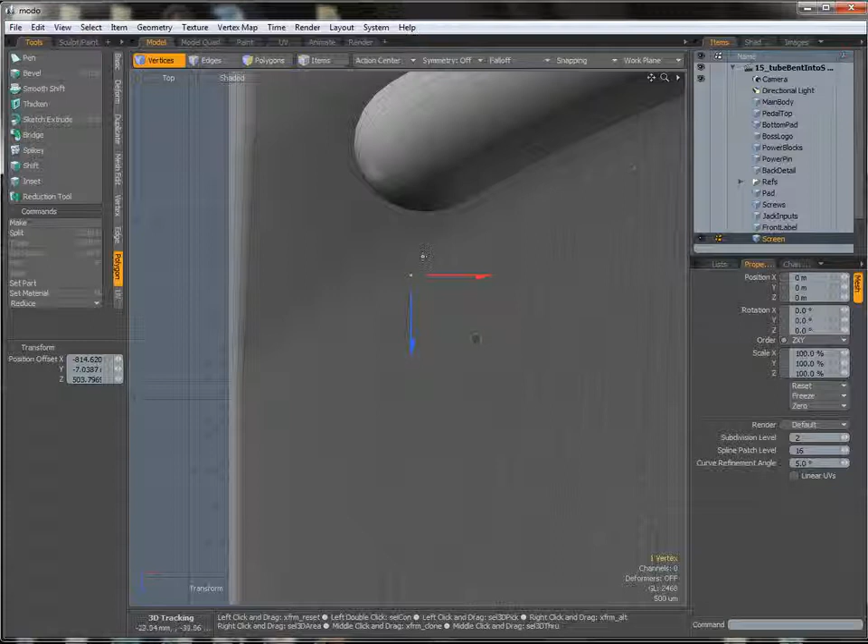That looks pretty good to me—that curve seems to be pretty much correct. I'm going to hit space to drop the tool. Now the other thing is that this curve is still coming down here and then straight out, same down here—coming straight down on this curve and then straight out towards the side of the pedal. What we want is for it to actually keep following the curve.

So I'm going to select all of these verts, and we're going to use a fall-off again. I'll come up to fall-off and click on linear, then click and hold on the right side up here and drag out to just past the left of these verts. Then I'll activate the move tool with the W key, and we're going to pull down slightly.

So what am I doing here? If you follow the linear fall-off shape, the verts here at this part are getting 0% of the move, whereas the verts on the very outer edge are getting 100% of the move. So it's moving them down kind of diagonally to follow this curve, and that's what we want.

Something like that looks pretty good to me—that looks pretty close, might even be a little bit low, but we can fix that in a second. I'm going to hit space to drop the tool, turn off our fall-off by clicking none, and these have moved slightly. This curve is perhaps slightly a little bit too low now.

So I'm going to activate the move tool, tweak these up a tiny little bit, then activate the scale tool, right click on this top vert, and scale this up ever so slightly, something like that. You can see it's really just a case of coming in and tweaking them until the polyflow looks correct. We could do the same for these verts here, but to be honest they're not particularly in need of it—it's these guys at the top and bottom of the curve that are important.

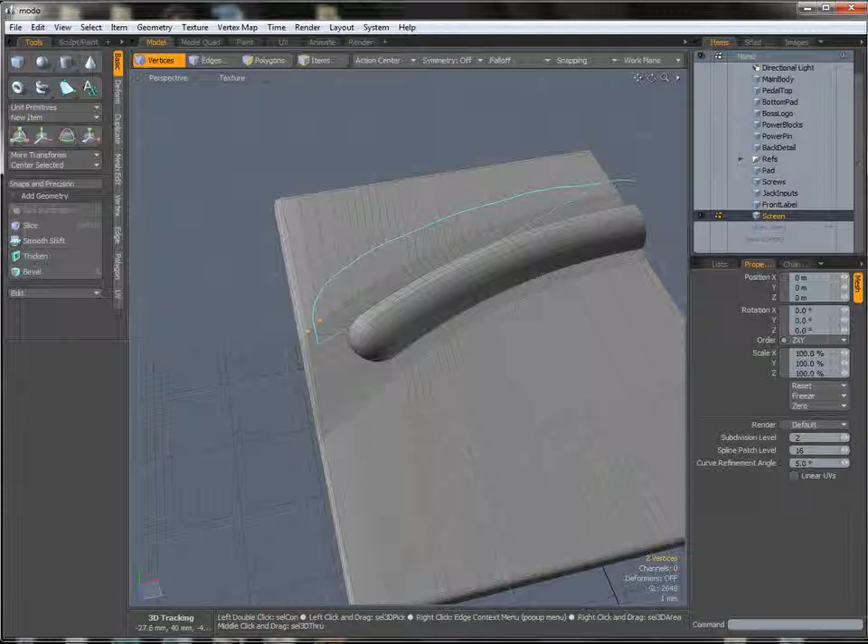Now why did this happen exactly? Well, all of the verts that we bent into position have been slightly raised on the y-axis. Now whether this is something to do with the bend tool or whether it's something that I did and didn't notice, it's a problem that we have to fix. So what I'm going to do is come in and lasso select around all of the verts that we initially bent into shape. I'm then going to go back to a side view, zoom in slightly at the top of this curve here, and activate the move tool.

Now what I'm looking for is for that vert to be at the same y value as that other one. So we want this vert here to come down to that line. So I'm going to move this on the y-axis until that is about there. So minus 160 is about correct. So I'm going to hit space to drop the tool and go back to perspective mode. Now everything looks exactly as it should.

So after saving our scene, we can now make a start on the button. So I'm going to bring back our ref objects. And you can see that we have to punch a hole through this screen object. And as this is quite dense at the moment, it has an awful lot of edges on it, we're going to do that in a new working mesh layer. So with that layer selected, I'm going to come up to the Basic tab and click on the Cube tool.

And we're just going to draw out the shape of that button. Now I'm going to make that slightly larger than the hole in the reference image. And when you're happy, I'm going to hit space to drop the tool, and we can hide the screen layer. So with the mesh layer selected, I'm going to select that polygon. We can bevel that in slightly. So by now you should be used to adding that extra line of polygons around an inset.

I'm then going to go to perspective view and zoom in slightly. I'm going to shift click to reactivate the bevel tool, bring it in again, so inset it and shift it down to create a top bevel. And then going to shift click again and drag this down to about there.

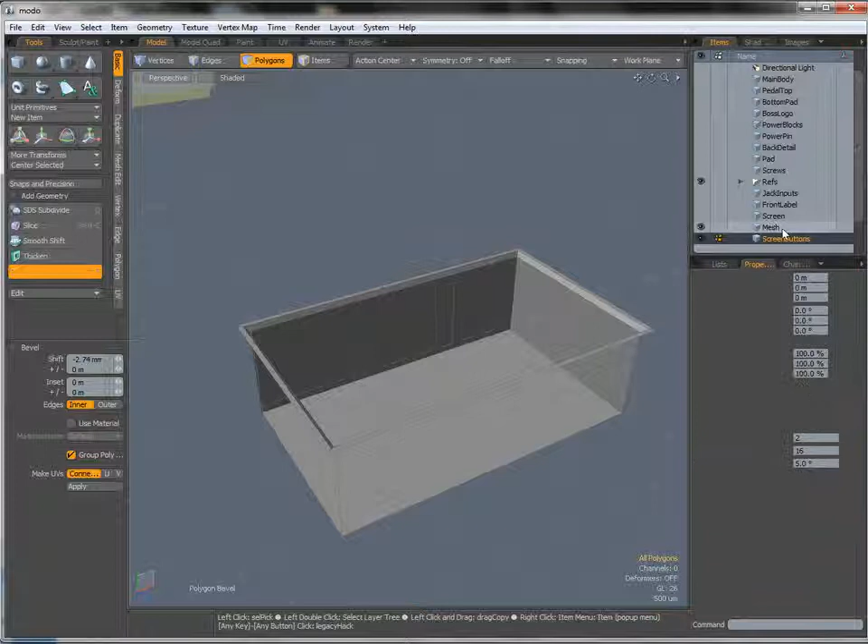Now this is actually going to make up the mesh of our button, so I'm going to cut that with Control X, go into a new mesh item, rename that Screen Buttons, and Control V to paste in that polygon. With that done, I'm going to reselect the mesh layer and click the eye next to Screen Buttons because we don't need to see that for now.

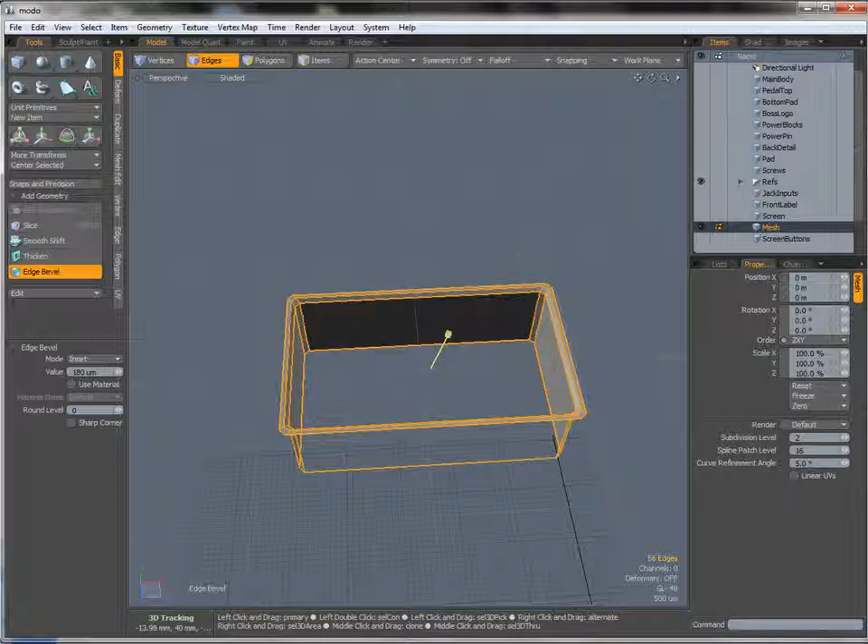Now I've still got the bevel tool selected, so I'm going to hit space to drop that, and we can start work on beveling these edges here. So I'm going to go to Edge Mode, and lasso select all of these edges, then hit B on my keyboard for bevel, and pull out an edge bevel with a round level of 0. So something like that looks pretty good to me.

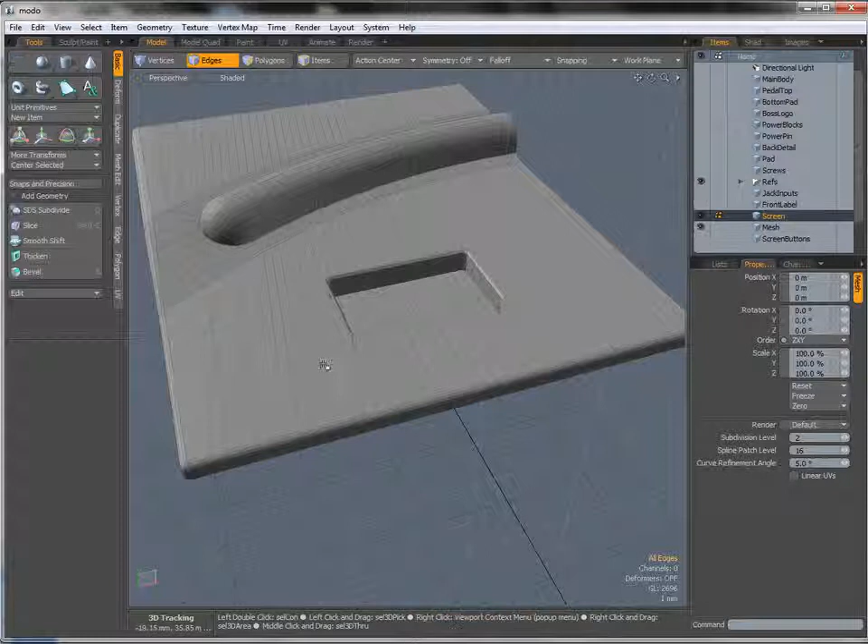Now, if we go into the screen object, if we bring that guy back, we're going to have to connect these guys up somehow. And at the moment you'll notice that we've got an awful lot of polygons making up the screen object. In fact, some of them are completely pointless. Take for example, if I go into the screen layer, all of these guys down here.

The fact that we've got a round level going this way is good because we're making up this nice smooth beveled edge. However, all of these extra polygons and edges going this way aren't adding anything to the model. In fact, they're just completely a waste of extra resources. We've added 170 polygons where we could have 6. So if we can somehow add in the button and clear this up so we have less polygons, that would be a great thing. And we can do that, and I'm going to show you how.

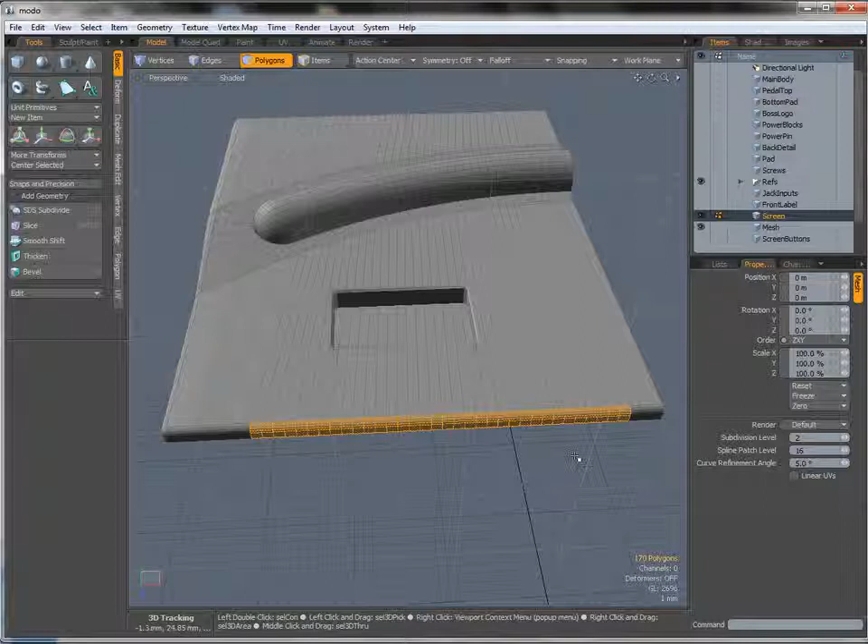So I'm going to deselect those polygons quickly. I'm going to go back into the mesh layer and we're going to position this at the correct height. So I'm going to double click it and go into a side view, zoom in, activate the move tool. I'm just going to pull that down until it matches the height of the screen object. With that done, I'm going to go back to perspective view, go into the screen layer, and we're going to delete all of these polygons.

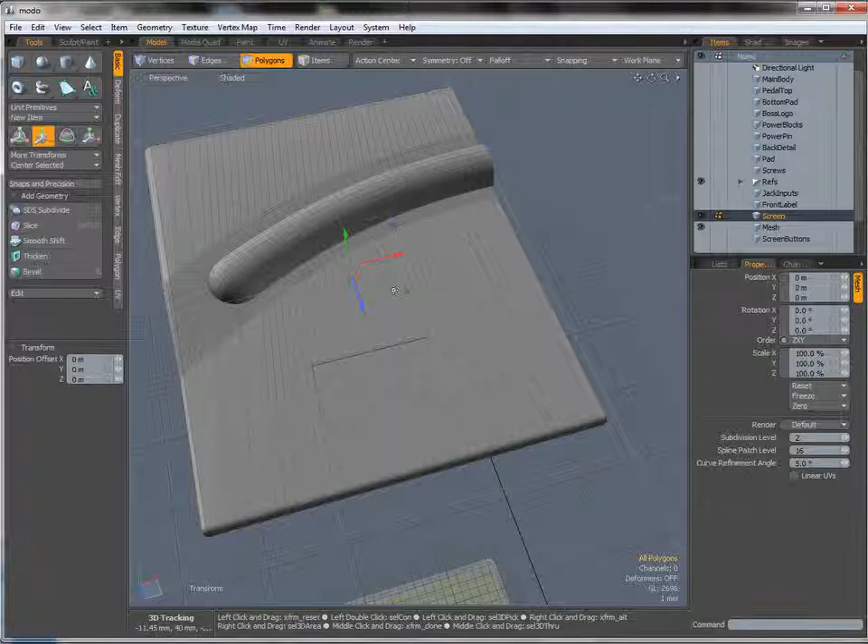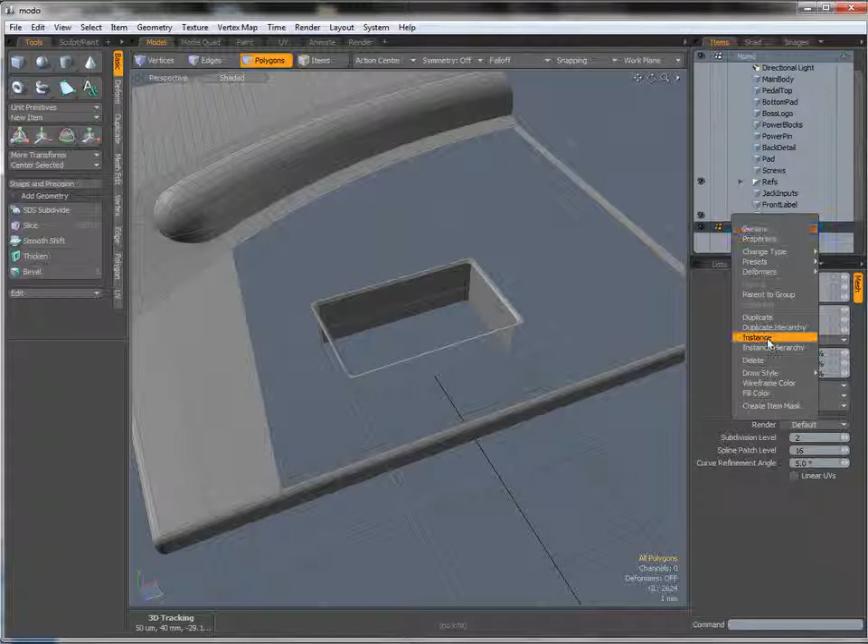So what I'm going to do is grab all of these guys in here except for this last one. We're going to leave that one there for the minute. And with all of these selected, I'm going to hit delete on my keyboard to get rid of them. Now that we've got the space there, we can move this button mesh into the screen layer. So I'm going to click on the mesh, double click this and click Control X on my keyboard to cut it, select the screen layer and Control V to paste it in, and then we can right click on this mesh layer and delete to delete it.

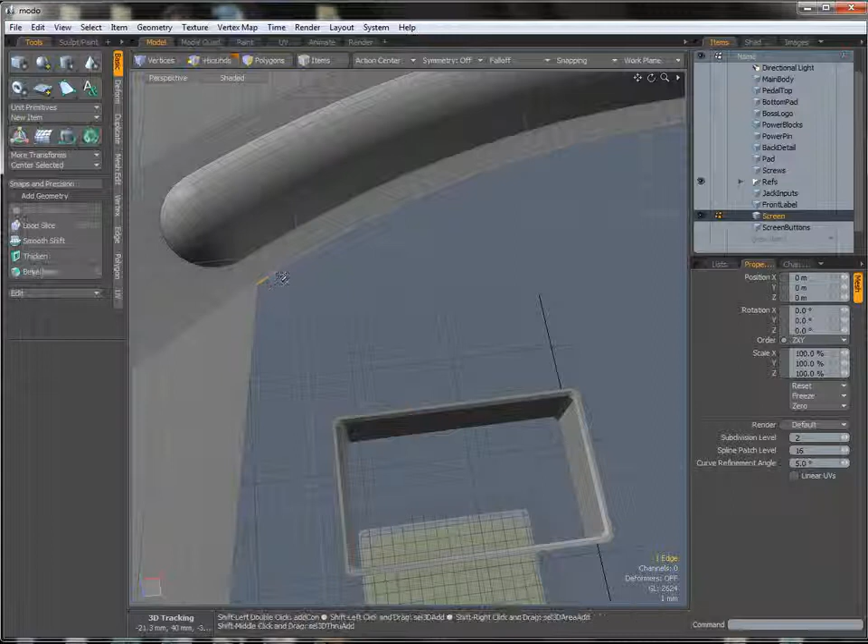With that done, we can go in and start connecting these guys back up. So I'm going to click on the screen layer. Now we're going to be using the bridge tool again to add in all of these polygons. So remember, we need the same number of edges in each of these edge loops. So first of all, I'm going to come up and select this edge, shift click that one, and then hold down the up arrow, which will continue that selection, and then tap out to the end here. So I just want these guys that border this hole. And you'll see that we've got 36 edges.

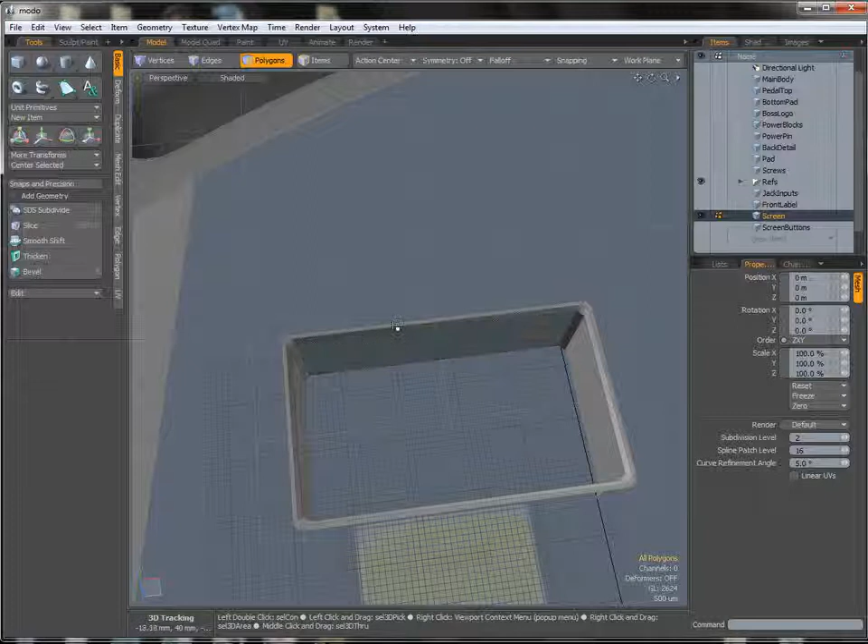So if we now come down and have a look at this guy, we've clearly got 1, 2, 3 edges. So we need to add in 33 extra edges in order to connect this top edge here to the top edge of this buttonhole. So I'm going to come in, click one of these edges and Alt-C for the loop slice tool. I'm going to right click and add in 33 extra edges.

Now with that done, I'm going to select all of these edges up the top here. Hold down the up arrow to keep selecting and then tap out the last few. I'm going to do the same down here. I'm going to shift click this first one and the second one, and then hold down the up arrow and then tap out the last few. So we're only going to these top bevels here. But with that done, we can come to the edge menu or the polygon menu, click on the bridge tool and right click, and we add in all of those polygons there.

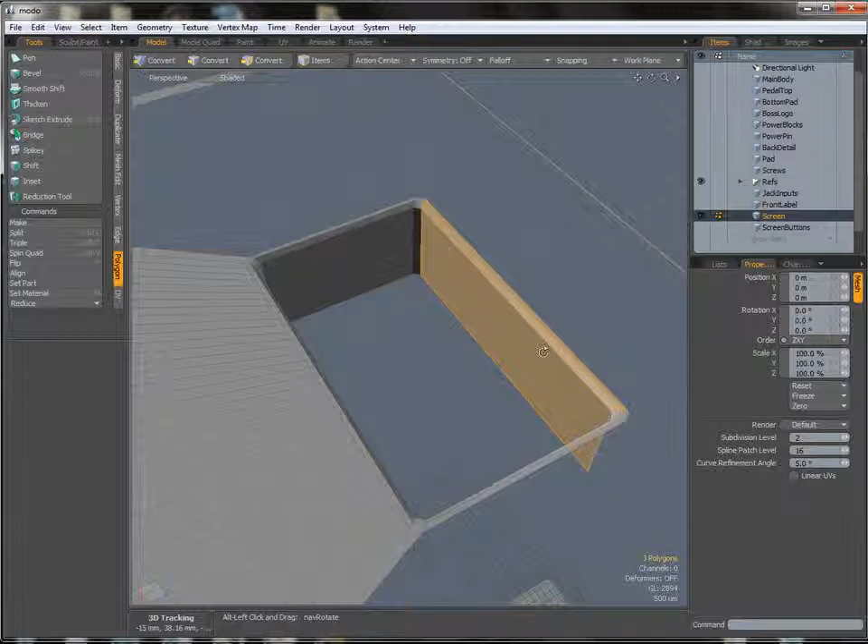Now you'll notice that with all of these edges added, now that we've got a hole down here, these edges don't actually continue to this side. So here we've only got a single polygon along the width. So when we connect this to here, we're actually not going to need all these extra edges. We can actually get rid of all of these guys. And that's exactly what we're going to do.

So I'm going to come in and drag along a couple of these edges, then hold down the up arrow on my keyboard to select along and tap out towards the end. Now I think I've gone one too far there, so I'm going to hold Control and drag over that guy. I'm going to hold down Shift and double click to select these edge loops and hit backspace to delete it.

Now what we want to do is come down the side here and we're going to connect this edge up to here. So I'm going to select both of them, click the bridge tool and right click. We'll then do the same on the other side, select that edge, select this guy, bridge and right click, which will join those guys together.

And then down here we only have one edge, but here we have 1, 2, 3. So we are in fact actually going to have to add in 2 extra edges on this section here. So I'm going to select one of these edges, Alt-C for the loop slice and right click, but we're going to change our count to 2 instead of 33. So we've saved ourselves a whole bunch of polys down here. We've really reduced that an awful lot, and that's always a good thing to look out for.

So I'm going to hit space to drop the tool. I'm going to select this edge, shift select that one and that one. Then I'm going to shift select that one, and that one. Come up to the bridge tool and right click to fill in the rest of those polys.

Now you notice that this polygon here is kind of skewing a little bit into the center down the bottom here, and that's fine. It's not affecting the smoothing at all because we added this extra line of polys around the buttonhole. But just for aesthetics' sake, I'm going to grab these verts and move them slightly on the x-axis to just below this line here.

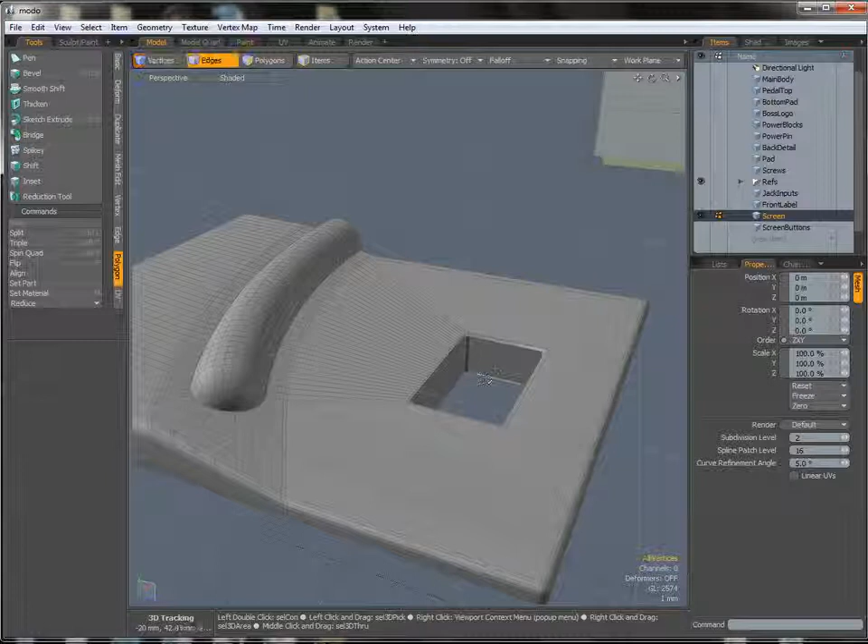And you may notice that the bottom of our button is far too low at the minute, so we're going to go in and fix that. So I'm going to double click this edge loop. I'm going to go into a side view. We want to pull this up to this bottom section here. So I'm going to pull up on the y-axis, zoom in maybe a little bit more, and try and get that as close as we can. Something like that looks pretty good to me. So with that done, I'm going to hit space to drop the tool and go back to perspective mode.

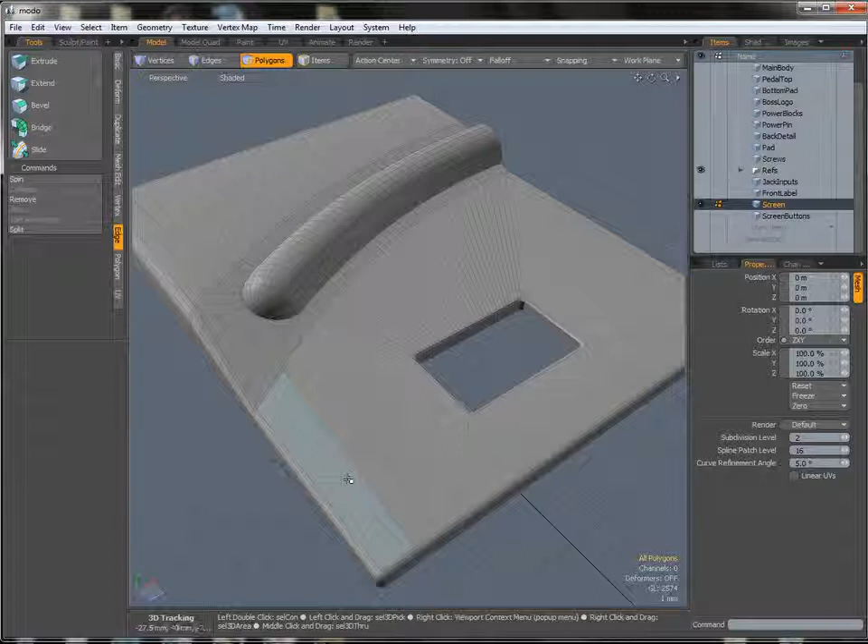We're now going to add back in the bottom of the screen object. However, instead of adding in all of these polygons from scratch, we're going to use some of these top ones to help us. So with the screen layer selected, I'm going to come in and start selecting some of these polygons. And the first thing I'm going to do is select this loop of polygons we created around the button inset. So I'm going to select 2 and then hit L for loop.

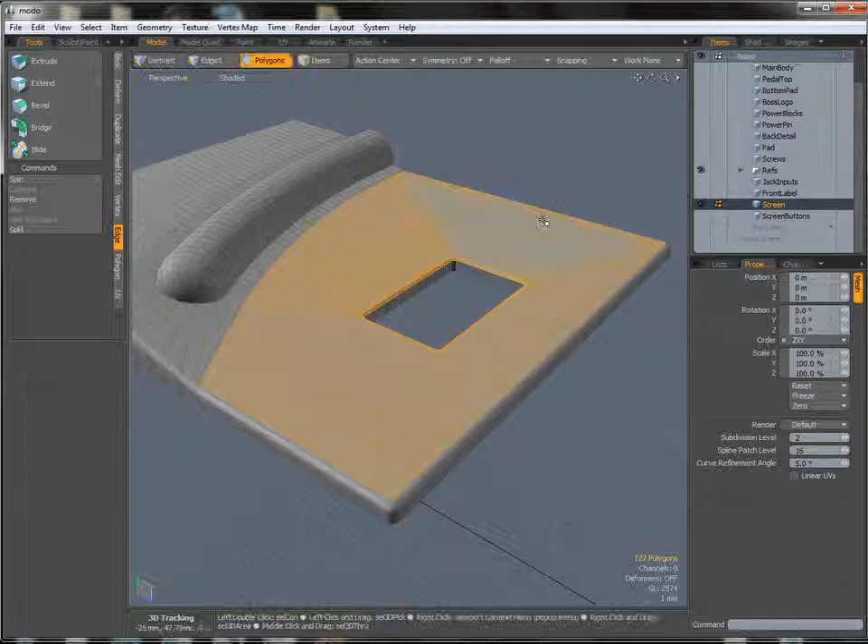I'm then going to hit Shift and the up arrow on my keyboard to expand the selection once. And then holding down Shift, I'm going to select this polygon and these 3 as well. So with all of those guys selected, I'm going to hit Control C on my keyboard and paste them into a new mesh layer with Control V. With that layer still selected, I'm going to double click the polygons and move them down slightly.

Let's switch to a side view quickly. You notice we do have some depth and height in there, so I'm going to hit the scale tool, which is R, and set the Y scale to 0, like that. With that done, I'm going to move these back up into position with the move tool. So something like that. Go to perspective mode.

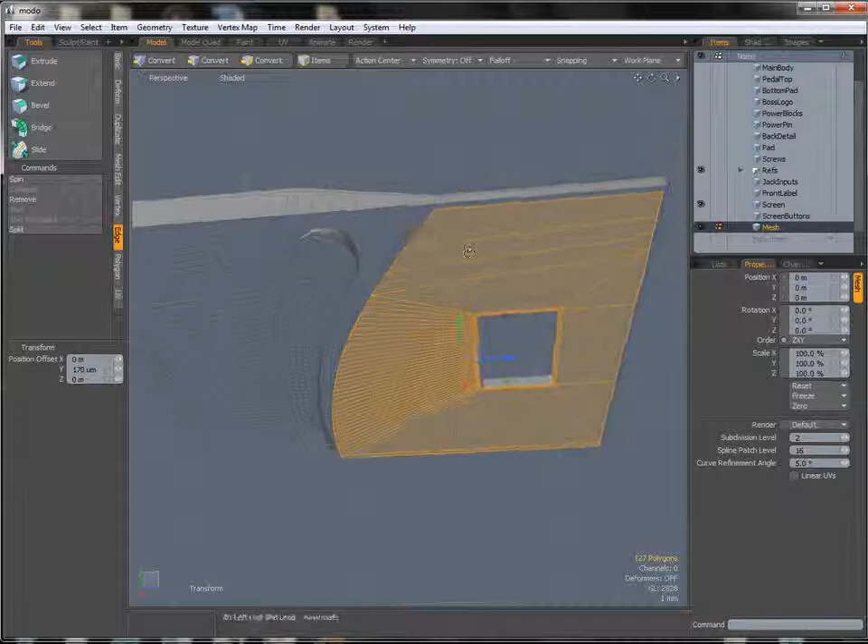If we go to the bottom, at the moment you can see that we can actually see through these polygons because they're facing the wrong way. So I'm going to flip them around with the F key. They become much more solid like that. And I'm going to cut them with Control X and paste them back into the screen layer. Before we forget, we can delete that extra layer over there.

So I'm going to select the screen layer again, and we can go in and start connecting up some of these holes. Now the first thing I want to connect up are these two edge loops in here. So basically what's happened is these aren't quite at the same level. So what we can do is basically use the bridge tool. I've selected both of these edge loops. Select the bridge tool and right click to join them up. I'm going to hit space to drop the tool, then come in and select this bottom edge loop like this and hit the backspace key to get rid of it.

Now you notice that we've got this outer line of polygons here. And then we've got this inner line, and this should be where our bevel is, but at the moment our bevel is pretty much non-existent. And we can fix that by going to Edge Mode, double-clicking this edge loop here, activating the Move tool, and then moving these on the Y-axis, like that.

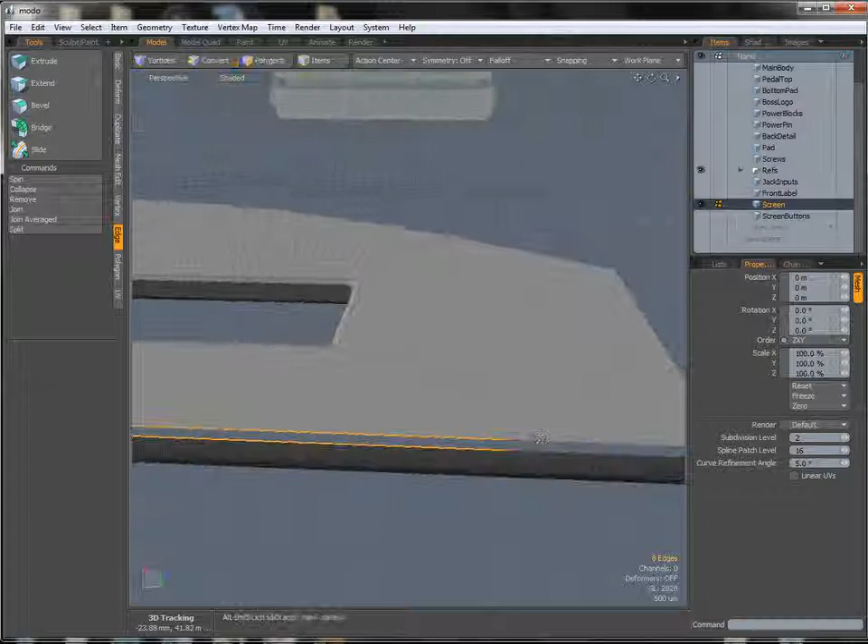So with that done, I'm going to hit space to drop the tool, and we can start filling in some of the other polygons. I'm going to come to this edge down here, start selecting these edges that we want to fill in with the bridge tool. You notice because we copied and pasted them, they've got the same number of edges in each loop that we're connecting. So with these 8 selected, I'm going to come up to the bridge tool and right click to fill those in and hit space to drop the tool. And then going to skip this corner and fill in these side ones. So select both those edges, bridge tool, right click to activate.

We can then zoom in on this corner, double click that edge loop and hit P to fill it with a polygon. And then obviously this is an n-gon, it's not 4-sided or 3-sided, so we need to fix that. So I'm going to deselect those edges, activate the edge slice tool with the C key, and drag an edge from the middle of this curve here to this edge there. And that turns both of these into quad polygons.

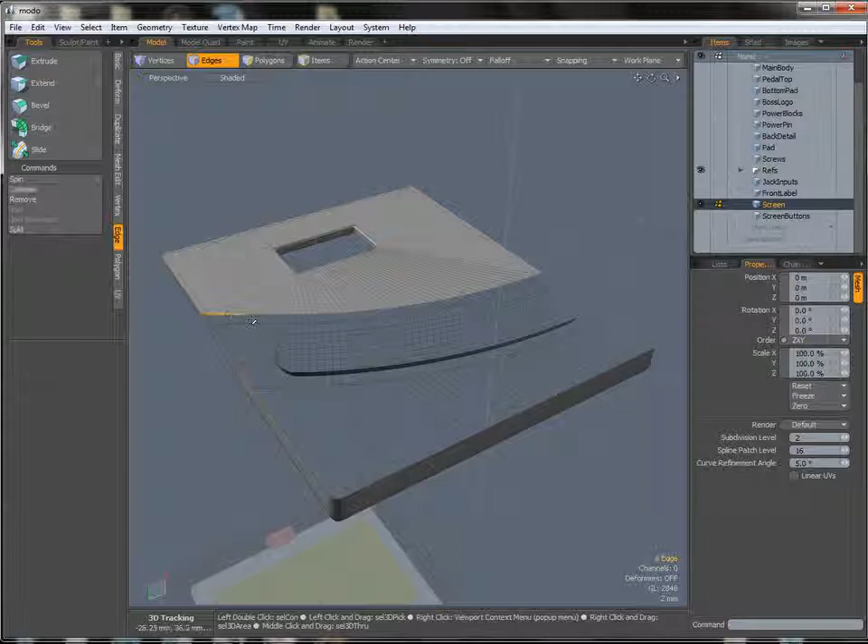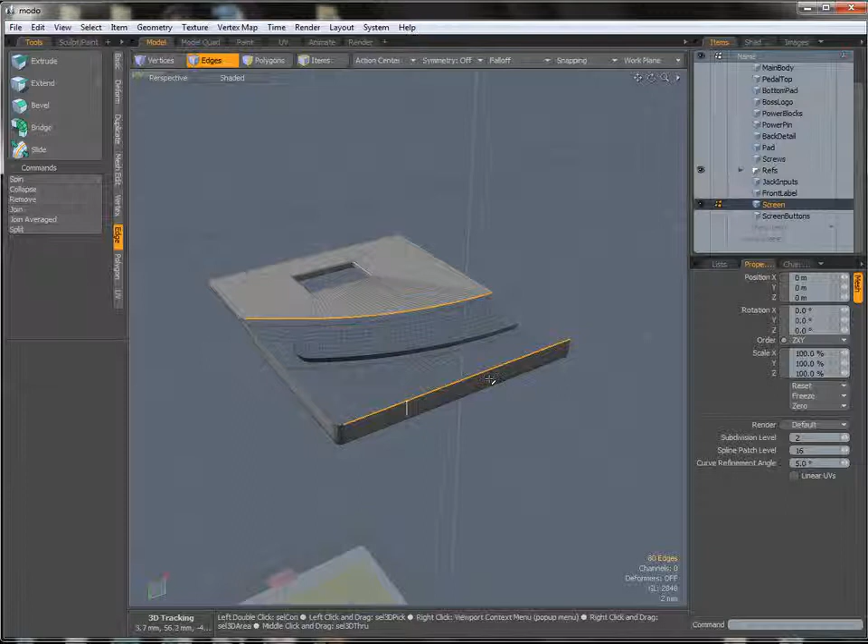We can then fill in the rest of this bottom area of the screen object. So I'm going to start by selecting these edges. I'm going to miss out this first edge here, shift select these second two, and then hit the up arrow on my keyboard to the very end. So I'm going to tap out the last couple like that. We've got 40 edges selected there. I'm then going to come into this part, miss out this corner, shift select this first edge and the second edge, and then tap the up arrow to the very end. And you'll notice we have 80 edges selected, which means we've got 40 in this part and 40 in this part, so we can use the bridge tool to connect them up.

Now all we need to do is add in this last polygon. We're going to start with a corner here, and what we're going to do is the same as we did down the front. So for that we need an extra edge along here, so I'm going to activate the loop slice tool, and with the count of 1 I'm going to drag this into position about there. I'm going to hit space to drop it and create that polygon on the corner there, like so. So I'm going to select all those verts in a clockwise direction and hit P on my keyboard to create a polygon. And then going to split that up with the edge slice tool, which is the C key, into 2 quad polygons like that.

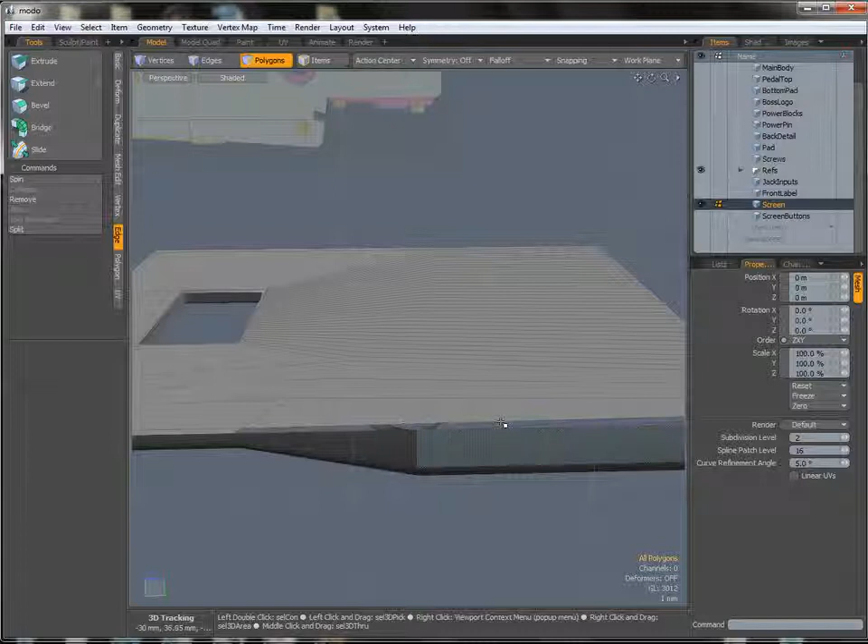Now what we need to do is fill in this last section. So I'm going to double click the edge loop and hit P to fill it with a single poly. And you notice that this thing looks kind of crazy. It's flipped out on us and gone completely white. And this happens sometimes when you've got a lot of edges coming into the same kind of area like this. So we're going to go down these one by one and create these into quad polygons. So first of all I'm going to select one of these edges here.

Alt-C for the loop slice tool. I'm going to drag it out like that. And you see instantly that polygon has sorted itself out. It's kind of reconfigured it because you've got an extra point on that edge there. So I'm going to drag this out to about that level, space to drop the tool, activate the edge slice tool and draw an edge between them like that. So now all of these are quad polygons, which is what we want.

And now we're going to change these into quads. I'm going to start off by activating the edge slice tool and drawing an edge from there to there, which turns this into a quad polygon. I'm going to do the same on the other side of this. So I'm going to draw an edge from there to there, which changes this into a quad polygon.

Now we need 1, 2, 3 extra cuts along this section here. So I'm going to select an edge, loop slice tool with Alt-C, and right click, change the count to 3. And with that done, we can use the edge slice tool to add in the rest of these cuts, like so.

Now all that remains is for us to bevel this bottom section, so I'm going to double click one of these edges to select that loop, double click this guy to select this loop, and I'm going to come in and manually select those two. I'm going to come up to this section and keep selecting some of these guys. And then I'm going to double click this one, which will select up to this corner, double click this one, which will select up to there, and then all of these.

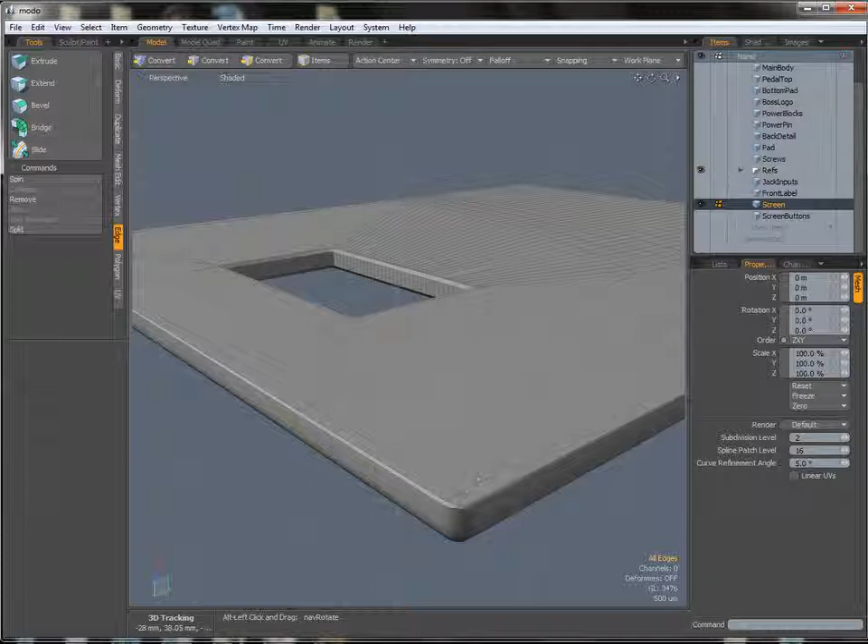So with all of those edges selected, I'm going to hit the B key for bevel and drag out a small bevel like that. With that done, it's just a case of quickly checking around the edge to make sure that we haven't created any tri-polygons by mistake. And it looks like we're good. So with that done, we can now start work on actually creating the button itself.

So now that we're creating the button and the little screw object that sits on top of the screen, we're back to basically beveling, edge slicing, moving verts and stuff like that. So I'm going to run through this section fairly quickly. So I'm going to bring back the screen buttons like that. And what we want to do is grab this polygon, go into the top view, and we're just going to scale it down slightly so there's a little gap in between the hole and the actual button itself.

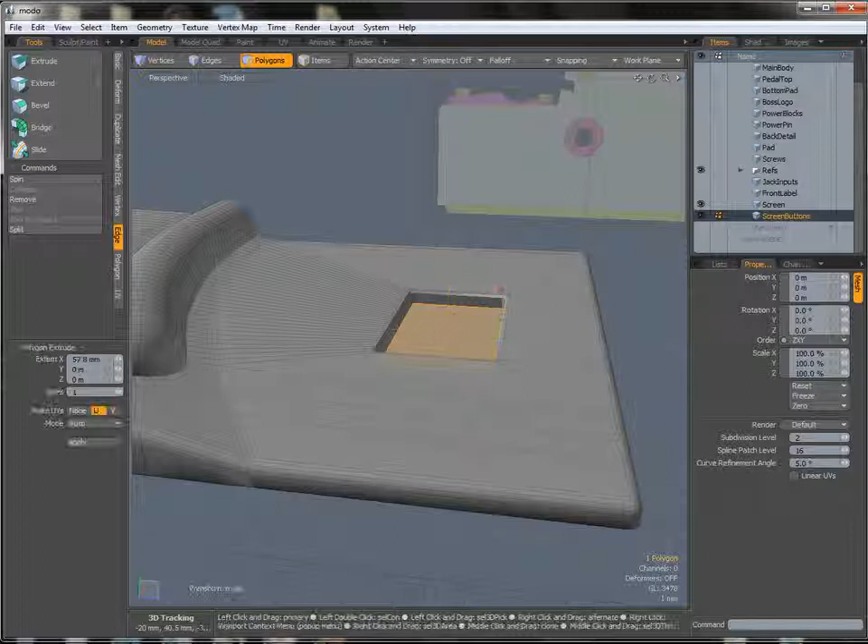And I'm going to go to perspective mode. I'm going to pull this up to just inside the button, like that. And I'm going to hit the extrude key, which is the X key, to pull this up. I'm going to go into a left view to match our reference, like that. And you'll notice that on our reference, the top of this button is curved, so we're going to have to add that in. So I'm going to go to perspective mode.

I'm going to hit space to drop the tool. I'm going to select one of these edges, and I'm going to hit the Alt-C key for the loop slice tool and right click. We're going to add in 5 edges, like that. Now with those done, I'm going to hit space to drop the tool and go back to a side view, and we're basically going to shape these manually, as there aren't a ridiculous amount this time. We can probably get away with it quite easily.

Now what I've done is select the middle one and pull that up to the top level of the curve. So we want to get it to about the top of the button curve like that, and then I'm going to select the 2 on the other side of it and pull those up, as these are going to be the same level as each other, so something like that. Then I'm going to do the same, grab those 2 and pull those guys up like that.

I'm going to go back to perspective mode and just check that that looks pretty smooth, which it does. So I'm going to hit space to drop the tool.

I'm going to select these very corner edges here, and we're going to bevel them. Actually, I'm going to bevel all of these side edges at the same time, so that one and these guys as well. I'm going to hit B for bevel and pull out the bevel like that. What we'll do is up the round level to 2 on these objects, pull that out a little further, so we get a nice button object.

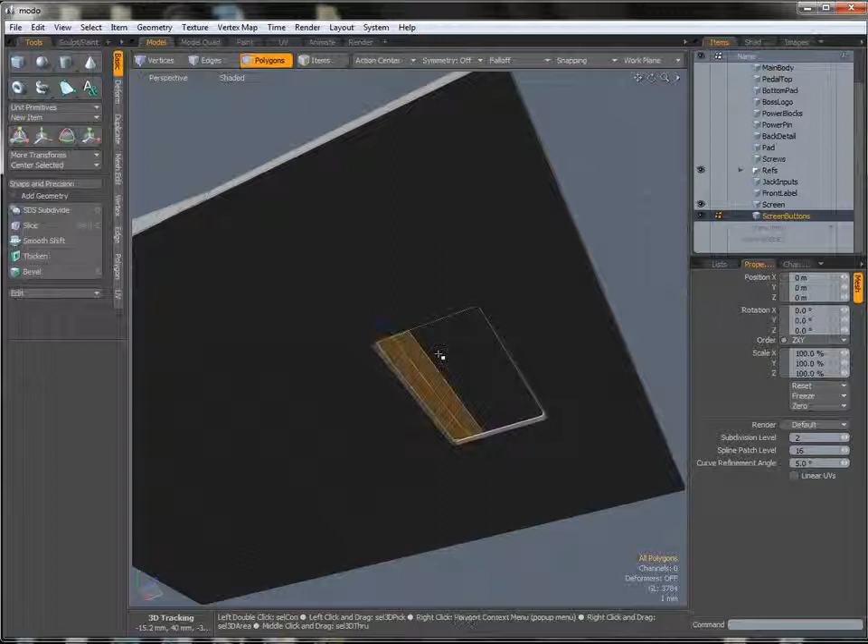I'm now going to go to the bottom of the screen button and just delete these bottom polygons, as no one's ever going to see them.

With that done, I'm going to go to the top view and start thinking about how to create these screen screws. Just like the power pin and the jack inputs, it's a case of creating 2 cylinders, one for the main body and one for the indent in the middle, ensuring that this outer one has a number of edges divisible by the number of edges on the inner one, so that we can connect them together using the bridge tool.

So the first thing I'm going to do is create this outer cylinder using the cylinder tool in the basic tab, making sure that it matches both our top ref and our side ref.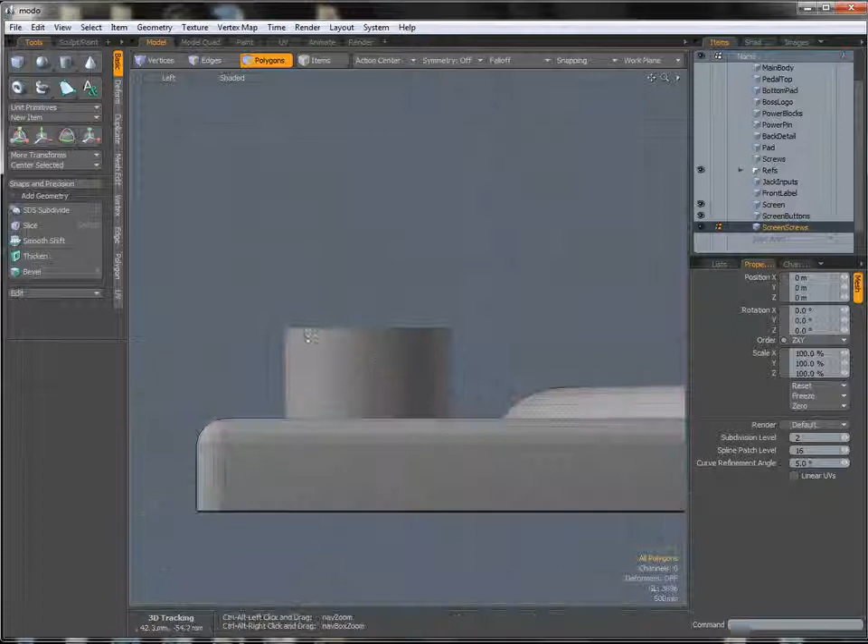Okay, so I've created this cylinder, and you'll see that it matches both the left reference there and also this top reference. I've created it with an equal radius in both directions, and it's got 36 sides. Why 36? Because it's divisible by the number of edges on this inner cylinder here, which is 6, so it should connect up quite easily with the bridge tool.

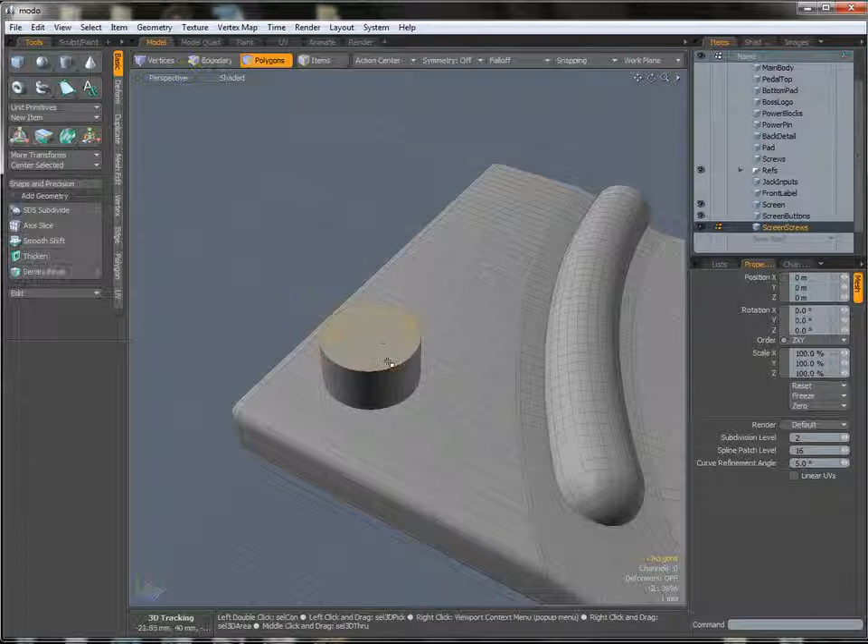With that done, I'm going to go in, grab this top polygon, and bevel it in slightly so it's just outside where our inner cylinder is going to sit, somewhere around there. Then going to hit delete and space to drop the tool.

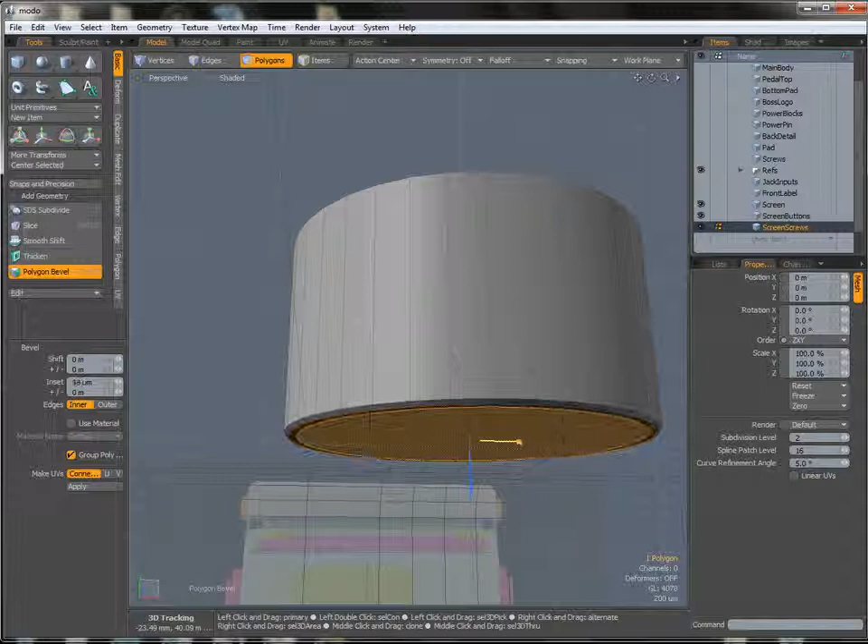Now with that done, I'm going to go back to perspective mode, quickly grab this bottom edge by double clicking and bevel it out slightly, so just about there. Space to drop the tool, and then going to inset this bottom polygon and delete it, and then hit space to drop the bevel tool.

I'm going to temporarily hide the screen layer and go into a top view. We want to draw out that inner cylinder, so I'm going to come up to the cylinder tool and drag out this shape here.

We want both of these radiuses to be the same, and we want the number of sides to be 6. So that looks pretty good to me. I'm going to hit space to drop the tool, go into perspective mode.

We need to make sure that that sits at the top of this screw object, so in a side view I'm just going to pull that into position with the move tool. When I'm done, I'm going to hit space to drop the move tool, and we can start thinking about how to join these up.

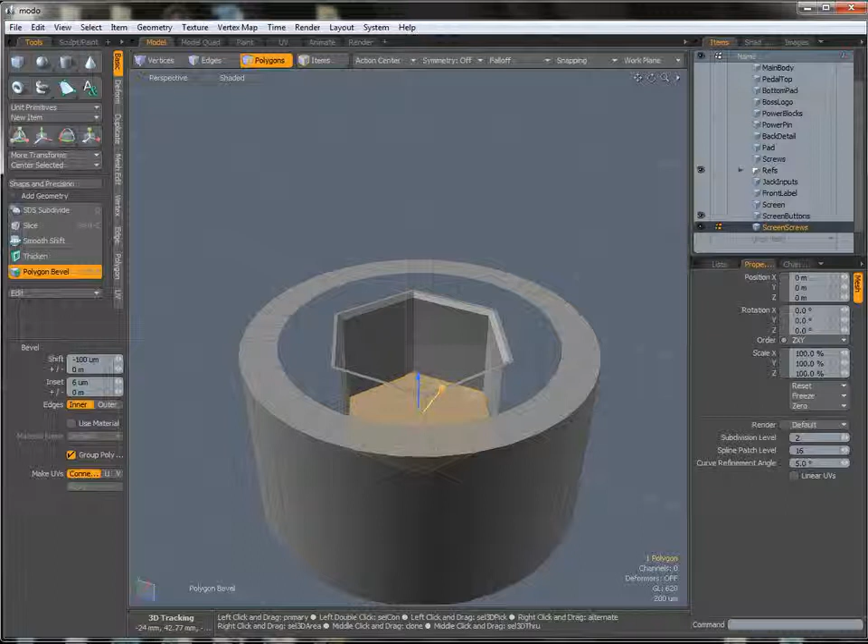Now first of all, I'm going to grab this polygon. I'm going to inset it slightly, shift click and inset it again, and shift it down to create that top bevel. Then I'm going to shift click and pull it down into the base of the screw. I'll then shift click one more time, drag down and inset slightly, shift click and inset that one more time, and then delete it. We're just going to delete that polygon for the minute.

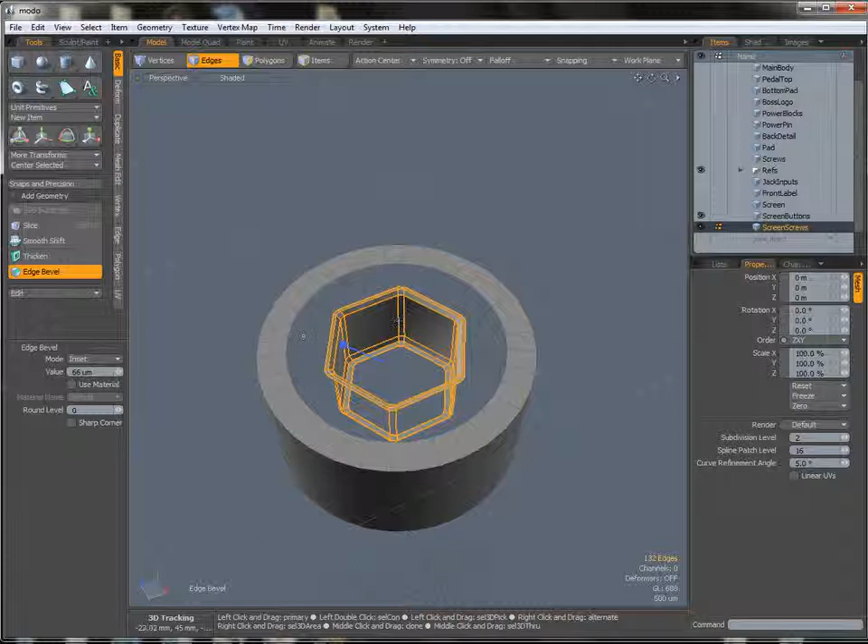Now what I want to do is slightly bevel all of these edges on this inner cylinder. So I'm going to grab all of these guys, just shift double clicking to grab all those loops. I'm going to hit B for bevel, just bevel these out slightly, like that, so we've got a round level of 0. Now let's have a look at our edge count.

So on this outer cylinder, we have 36 edges. On this inner one, we have 12 edges, so we have to add in 24 extra edges to this inner cylinder. Now we have 6 sides, and 24 divided by 6 is 4, so we want to add in 4 extra edges on each of these sides.

So I'm going to grab these edges here, and with our loop slice tool, which is Alt-C, I'm going to right click and set the count to 4. Then I'll hit space to drop the tool and double check our edge count. If I double click this one now, you'll see we've got 36 edges, and if I double click this guy, we've got 36 edges there as well.

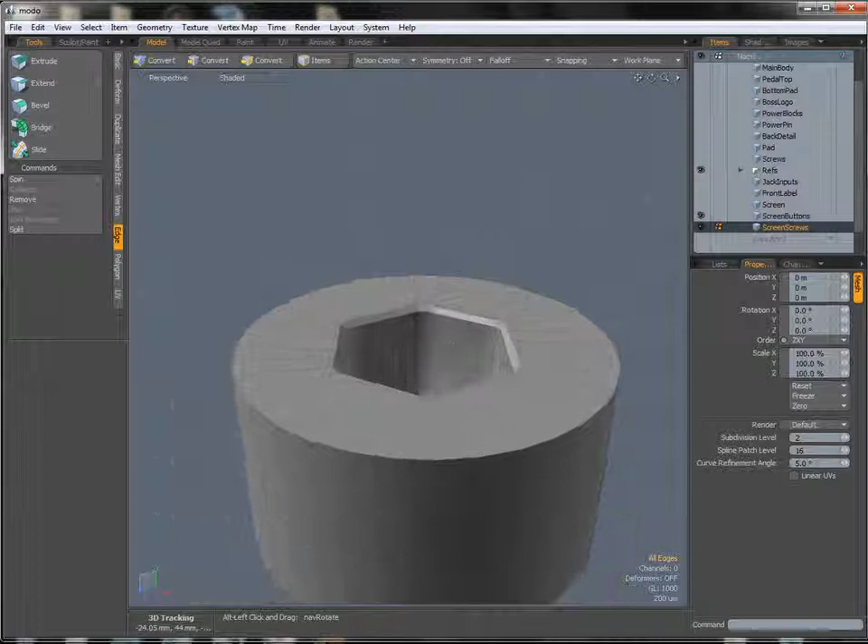So I'm going to shift click to select them both, come up to the edge menu, click the bridge tool, and right click. With that done, all that remains is for us to double click this outer loop and bevel that with the B key. We're going to add a little bit more of a round level to that, so a round level about 2.

So something like that, and then I'm going to hit space, and we can fill in that middle polygon. I'm going to double click that edge loop, hit the Z key for the extend tool, right click to activate it, and then instead of scaling it in or moving it at all, I'm going to come up to the vertex menu and click join averaged. It's going to say 36 vertices joined - we just get a single vertex in the middle of that hole.

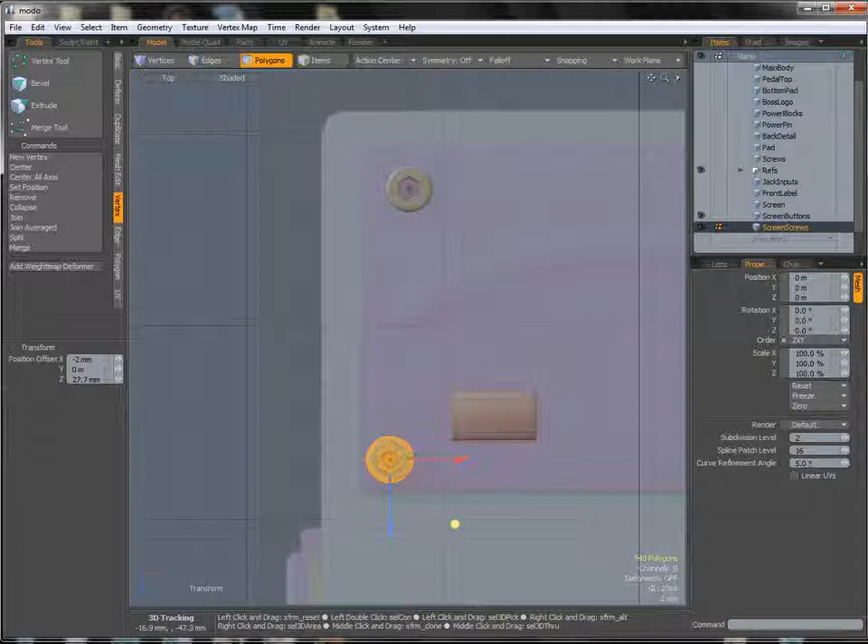So now we can double click this guy, go to the top view. I'm going to hit Control C for copy, Control V for paste, and we're just going to move this into position down there. Now I'm going to rotate it slightly on the y-axis like that, then come to a side view and move it down into position. I'm just going to bring back our screen layer to ensure that we can get the screw to sit just on top of it, like that.

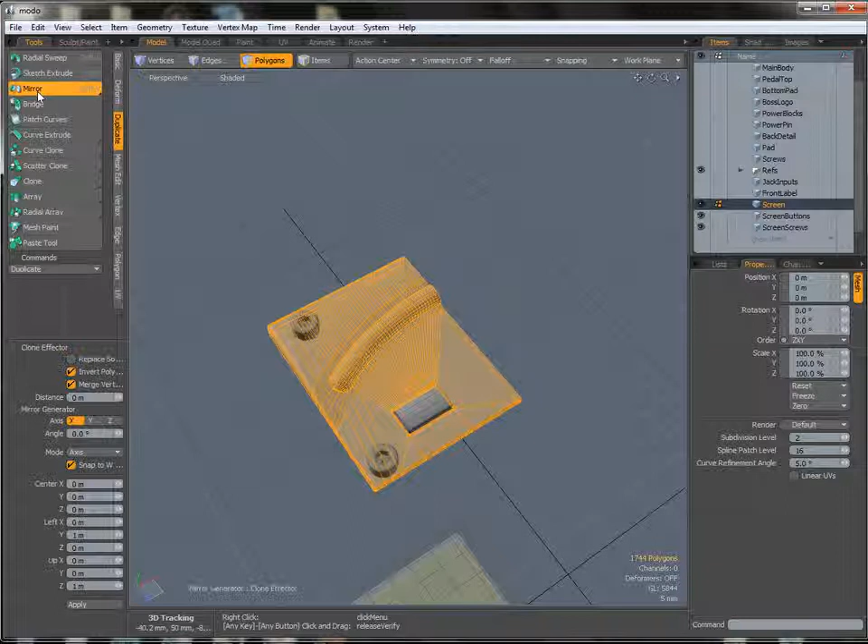And with that done, all that remains is to mirror all of this over to the other side as well. So I'm going to come into the screen layer, double click the entire object, come up to the duplicate menu, click on the mirror tool, and with the axis set to X, I'm going to click apply. So that looks pretty good to me.

Now I'll do the same for the buttons, so I'll come to the button layer, double click the button object and duplicate mirror. I'm going to hit apply, and that will copy the button over to the other side. Then finally we'll do the same in the screws layer, so we'll double click this top screw, shift double click this bottom one, duplicate, mirror and apply. That adds in all of our extra screen detail.

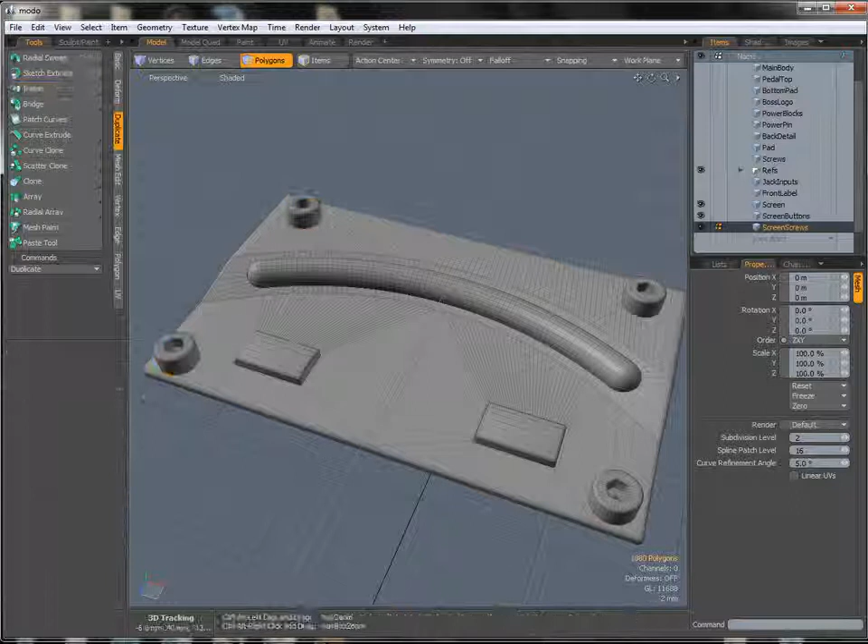So if we go in now and bring back all of our other layers one by one, you'll see that our Boss Tu-2 effects pedal is now completely modelled.

Okay, so all that remains for us to do is tidy up our item list. So I'm going to select the main body layer and then control click these other mesh layers, just missing out the refs group, and then hit Control G on my keyboard to group them together. I'll rename that guy to Boss Tu-2. So we can now toggle that on and off as much as we want and move it about as a single object.